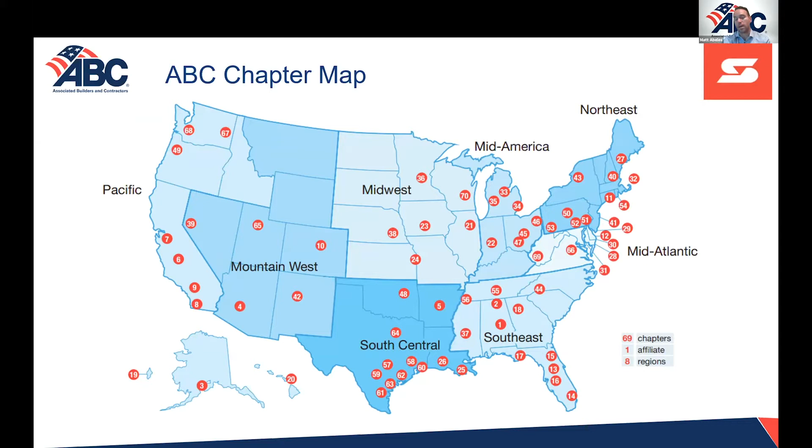We have 69 chapters across the United States, and within that we've got, as I mentioned, 22,000 companies involved. Most of those contracting companies fall under the mid and small size contractors, which is a little different than other associations, and our breakdown is here. So we've got a mix of everything. A lot of the other associations are focused on, maybe it's electrical contractors solely, or just mechanical contractors.

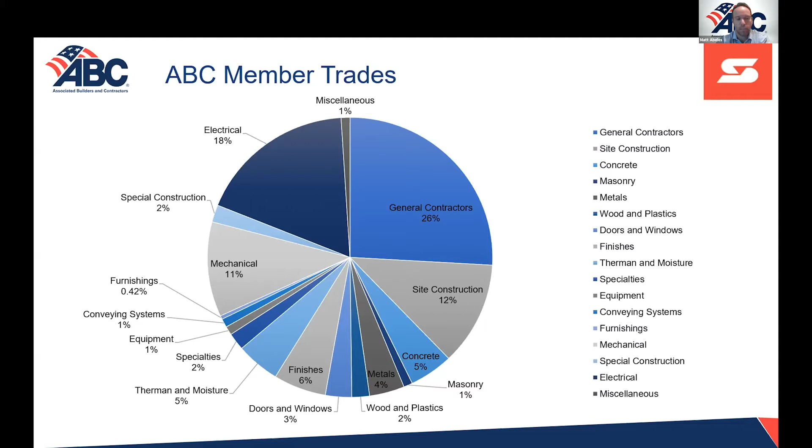Our association has diversity in that we work with general contractors, electrical contractors, mechanical, specialty—kind of a wide variety. I wanted to give you a quick rundown on who we are. I think it's important for context, and if anybody wants to get involved or engaged, you can reach out to me, follow us on social media, sign up for our free newsletter on Newsline, or just look at abc.org.

So I'm going to get into what we're covering. I want to start with COVID-19 technology solutions. I think starting here is important because when talking about a healthy job site of the future, given the unknown future, we have to start with how we're using technology and different practices to create a healthier job site during these trying times.

I'm going to talk about some solutions helping track people on the job site—specifically who's entering and exiting—ensuring the health of employees, documenting health, which is more important than ever, along with social distancing, how we're ensuring that social distancing, and monitoring proper PPE gear on job sites.

Here's a bird's eye view of some solutions being used today during COVID-19. Starting at the top left, the first two squares—that's a company called SoberEye. It's a 1-minute self-test that tests for fatigue, illness, alcohol, drugs, even if you're affected with COVID-19, in a portable, easy-to-use device with real-time monitoring. This takes an iris scan to get results, is fairly cost-effective, and is a solution that wasn't born in the U.S. but is coming here and being more utilized on job sites.

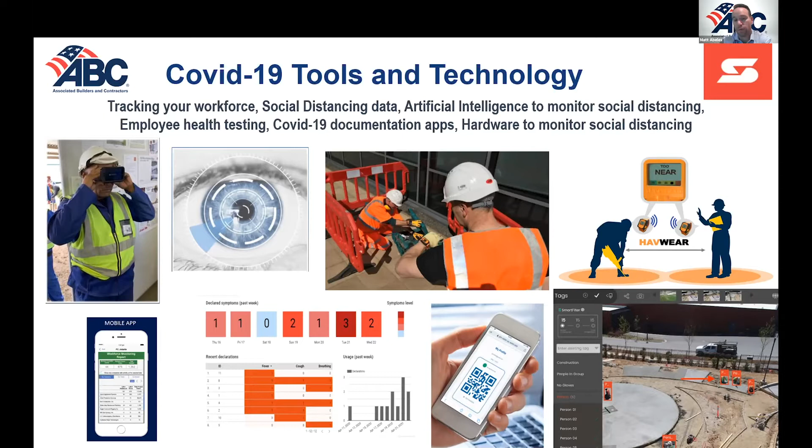Going a little deeper, SoberEye tests fatigue, sickness, alcohol, and drugs using a pupil scan. In the middle you can see this is a simple 1-minute test, and it's a subscription-based service. I like it because it's easy, intuitive, and non-invasive. In my experience with construction, the most intuitive technologies are the ones people actually use—the ones that provide quality data without overhauling too much. This is one I'm a big fan of.

Smartvid.io, I mentioned this a little bit, using real-time artificial intelligence to track those things, and not even just the PPE gear. You're also looking at tracking lifts, equipment on the job site, and ensuring social distancing. But the analytics and the data behind their safety observations, their dashboard is really impressive and easy to view. It's been helpful for a lot of companies, both large and mid-size. So as far as companies I'm looking at and I'm a big fan of, they're definitely high up there.

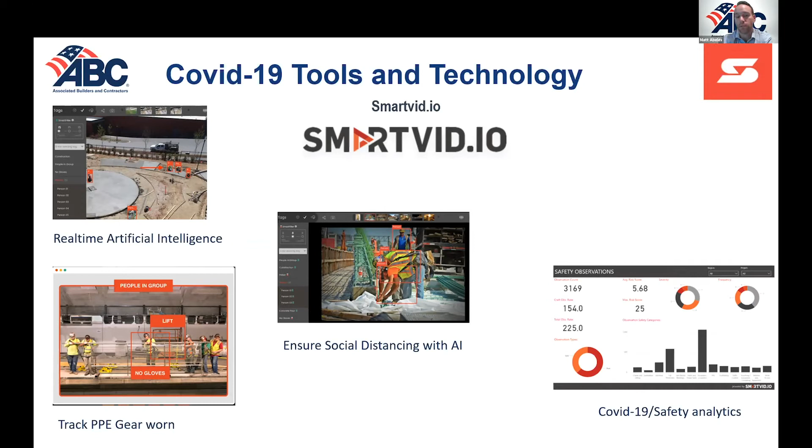So Reactec, this was another one I spoke of. That smartwatch is capturing real-time personal exposure to hand and arm vibration. It's looking at risk across your job site, but the system itself, outside of tracking your history on the job site with everyone, can tell where you've been, who's been exposed to who, where they've been on the job site, and take those analytics and send it back to management.

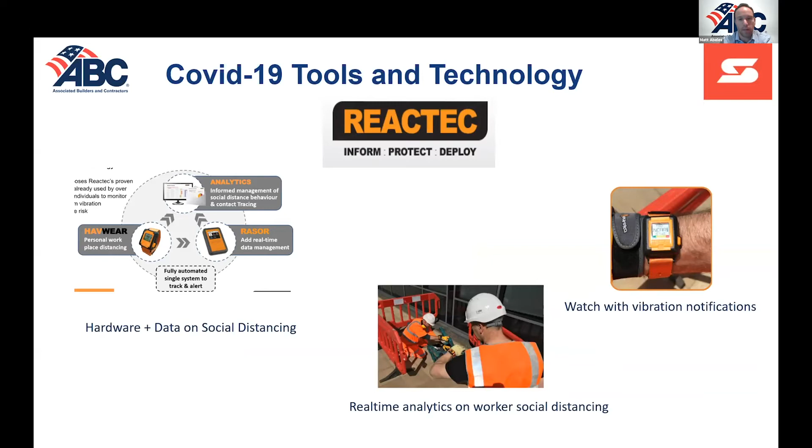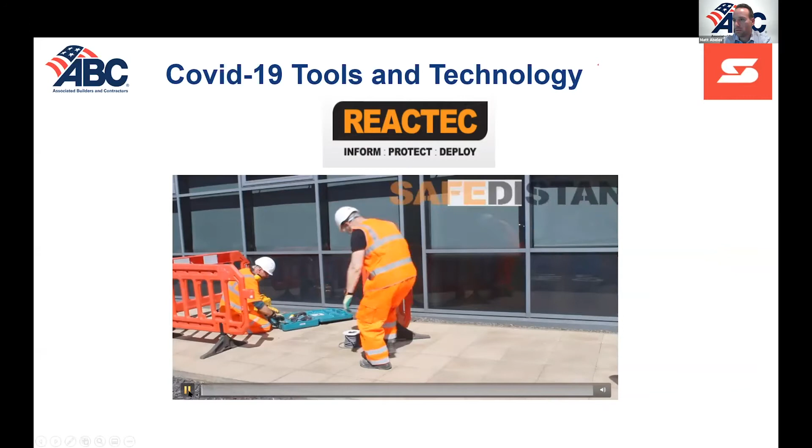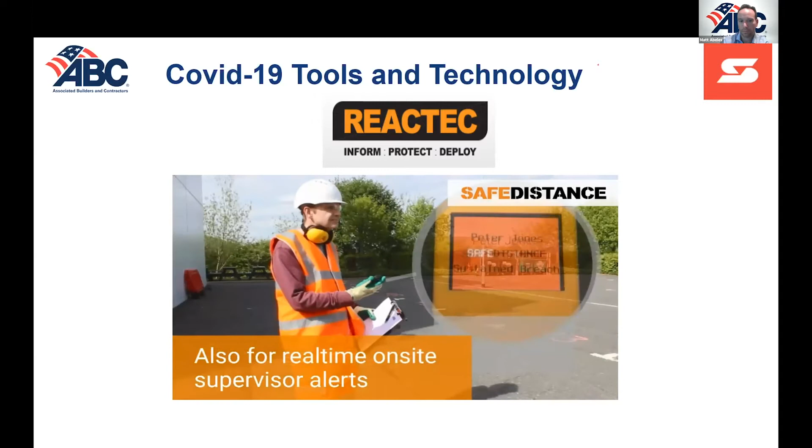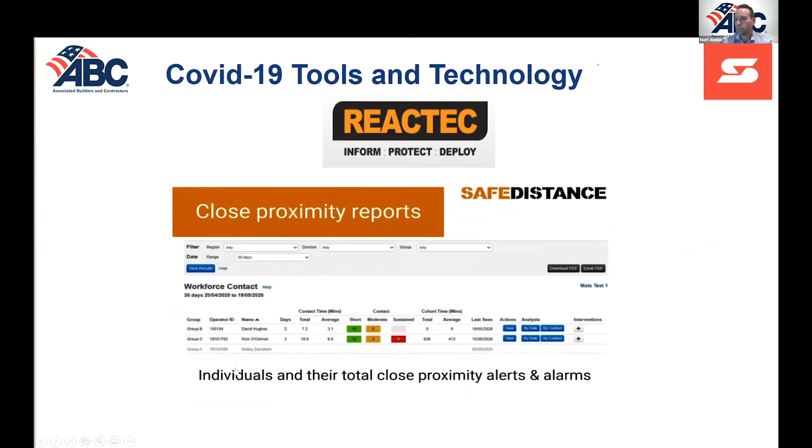So instead of me getting too far into it, I want to show you a quick video on this. For the interest of time.

So the next one I want to highlight is field control analytics. They've been an emerging player on the scene, and what they're doing is really simple: real-time COVID approvals for the job site. It tells you to the exact second when someone filled out their health screening, said they were okay, and were approved to go on the job site. They need to get approved every day. But then what they do that's extra impressive is the workforce monitoring report. They can show you how many and what types of trades were on each job site, minority stats, ethnicities, skill status, veteran status, all put on this dashboard.

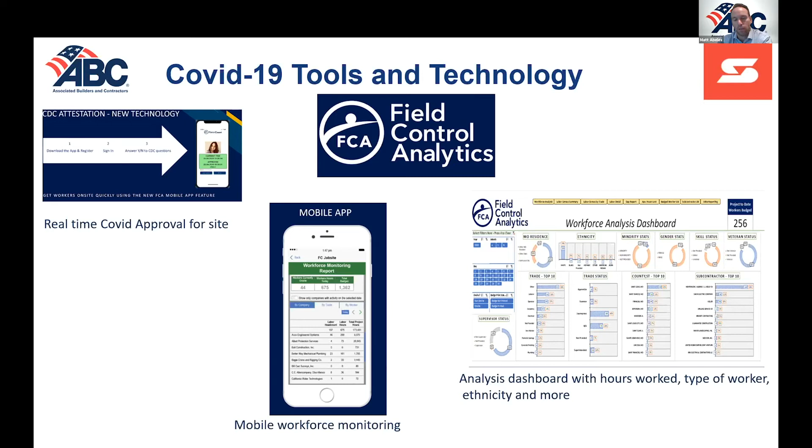And what companies are using this for, especially now with diversity and inclusion being a big topic, is taking a closer look at what's going on at all of their job sites. I like field control analytics because for them, data isn't secondary, it's primary. So they've done two things: made something very impressive for COVID, but also a very clear dashboard on what's going on at your job site in real time, looking at man hours, worker demographics, worker emergency contact info, safety training certification, contractor hierarchy, some of the critical data points that people should have.

So moving on, still on the topic of a healthy job site, I want to show you a few more safety technologies. Let's get into that. Just highlighting a few other things that I think are interesting when we look at what's going on with a healthier job site. I'm going to start actually in the bottom right this time.

So on the bottom right, you have a company called SafeSite. SafeSite is digitizing the safety documentation process. Not only are they digitizing everything, they're making it really simple to make sure all the safety requirements for a job site are there, that your toolbox talk information is in one place, and they've even come up with a way to grade every single job site based on what you put into the system. So they're giving real outputs that take predictive analytics into account.

To the left of that, you have a company, Pillar, and especially now with what's going on with wildfires out there, I think it's interesting that Pillar looks at what's going on in the job site conditions. So air quality control, looking at things like dust, making sure anybody who goes on the job site is safe. So in California, for example, where the air quality has gone down because of the wildfires, Pillar is a great device to tell you if people should or should not be on the job site.

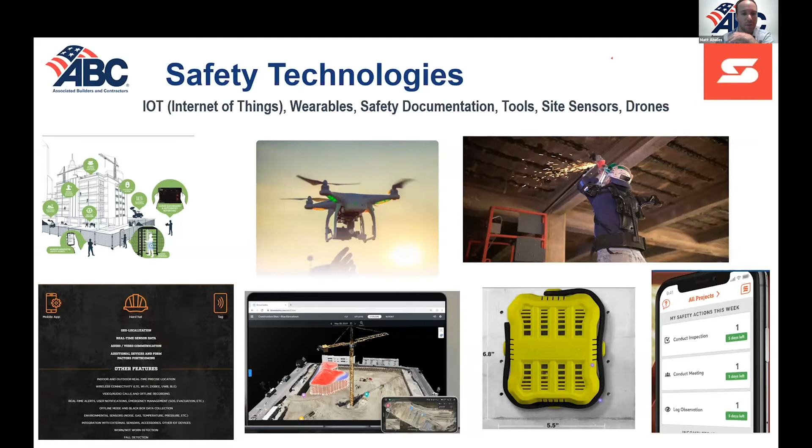One of the technologies I want to highlight is Triax. They have an IoT device to track worker safety. What they're doing is not only tracking where workers are on the job site, they're also tracking tool utilization, and they do a great job of safety analytics on the job site. If someone actually falls on a job site, it will also notify everyone that someone is hurt, and that it's an important scenario that a supervisor and everyone needs to be aware of.

I'll give a quick video on this in our time, but when it comes to job site safety and security, one of the most critical components is having full control over who has access to your site.

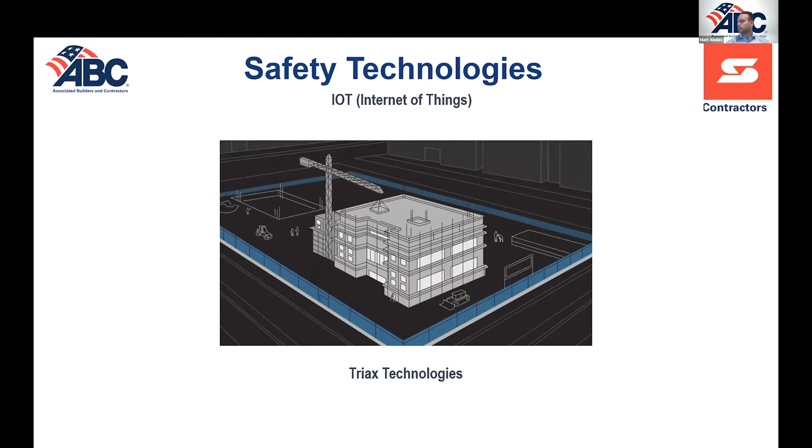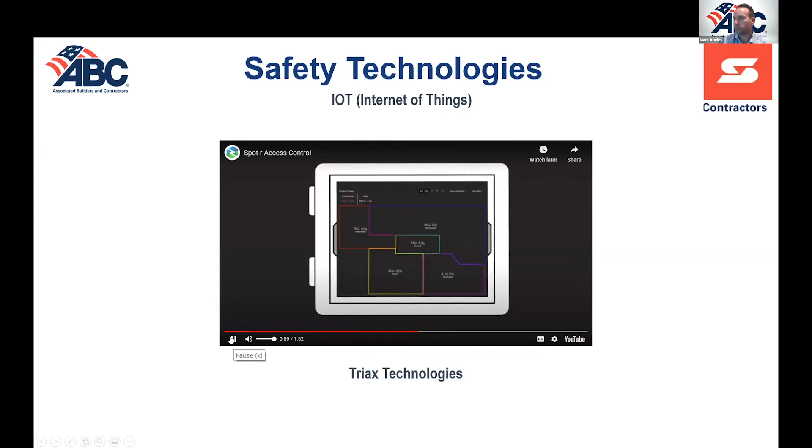Welcome to the next generation in construction site safety and security with the complete Spot-r connected job site solution and all new access control offering. By integrating the powerful core Spot-r technology with physical turnstiles, contractors have greater control over who gets onto a job site and unprecedented visibility into their presence on site. This essential technology gives you a higher level of accountability for anyone accessing your site and ensures those who lack proper credentials are prevented from doing so. The Spot-r clip serves as a worker's sole badge to get on site based on worker profile, certifications, or time of day. This provides a clear central record of when someone enters, when they exit, and where they're located by floor and zone to account for real-time and historic workforce activity. Unlike other access control systems, only Spot-r takes you beyond who...

Sorry, again, just in the interest of time, I want to fast forward. So Pillar, I mentioned before, is a hardware device that helps with on-site conditions. The one thing I'd add is it tests a lot of important things: temperature, humidity, carbon monoxide, noise, light, pressure. And if anything is off, it sends instant notifications to the supervisors on site to let them know what's going on.

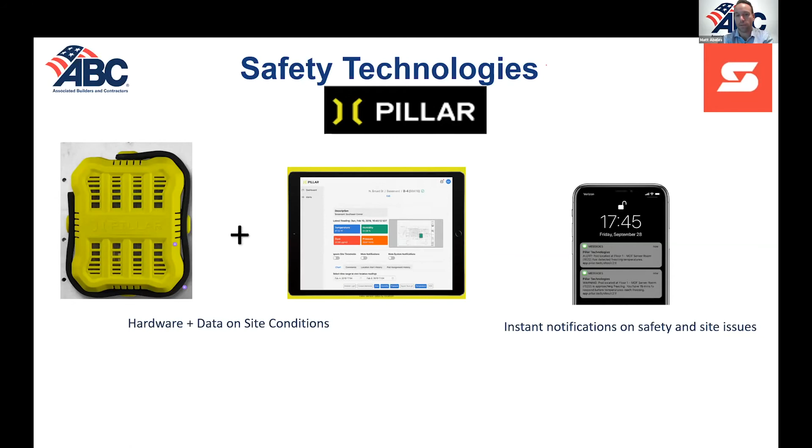And SafeSite, I wanted to highlight them. Again, this is a simplified safety documentation solution. For ABC, we have a lot of small, mid-sized contractors who may not have the budget of some of the larger contractors, so SafeSite is nice because they have a free version that helps you start making yourself more digitized. They're actually one of the companies involved in our inaugural technology alliance, which I'll mention later. It's a solution that's simple, intuitive, and has improved safety performance and communication by scheduling and tracking safety actions. It's easy to review your safety data, and it's done a great job of that. Like I said, to give yourself a score, almost a report card, for how your job is doing, SafeSite can give you some nice insight there.

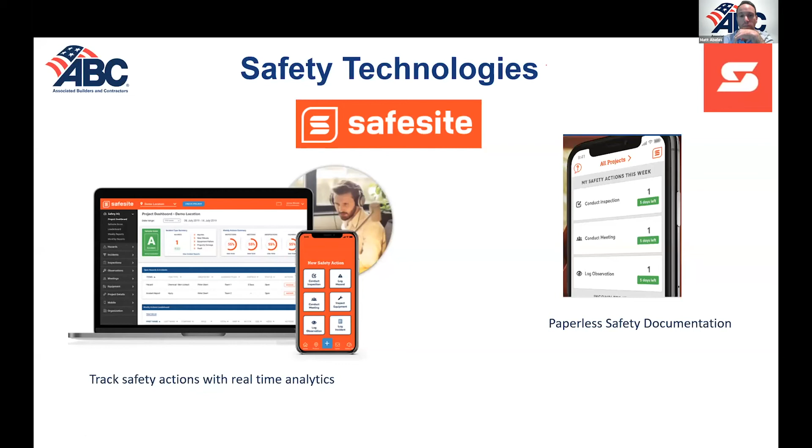So I'm going to go into job site efficiency. I think collaboration and site monitoring is a big piece of that. With what's going on with COVID-19, you have a lot less people on the job site and a bigger need for people to collaborate more off the job site. So when you're looking at job site efficiency and the future of that, you're really looking at a different way in which we collaborate.

The things I want to focus on, number one, if you look at the top left, I think most people are familiar with Zoom, but still we don't have it being used by as many people as you might think. Zoom is now getting more incorporated into construction. They recently built a partnership with Procore, and you're seeing a lot more contractors, not just the big ones but small and mid-sized firms, using Zoom as a way to collaborate. It really is cost-effective and one of the simplest, most intuitive solutions out there, but still there are a lot of contractors who aren't aware of it.

So there are three different solutions that I wanted to highlight specifically: HoloBuilder, StructionSite, and Open Space. These companies are all doing something very similar in that they're providing a visual command center.

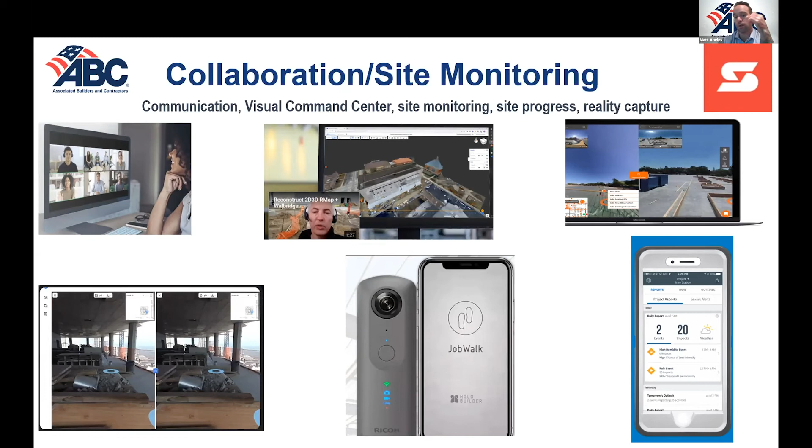So, not to get too into it, but if you look at Open Space, again 360-degree photos and documentation - this can be done on your cell phone. If you look at the bottom left, it shows quickly what happened from a certain point in time. This also makes sure that people get paid - it can say, hey look, we finished the job, you should pay us. Open Space has done a great job with portfolio management and making their solution easy and intuitive to use.

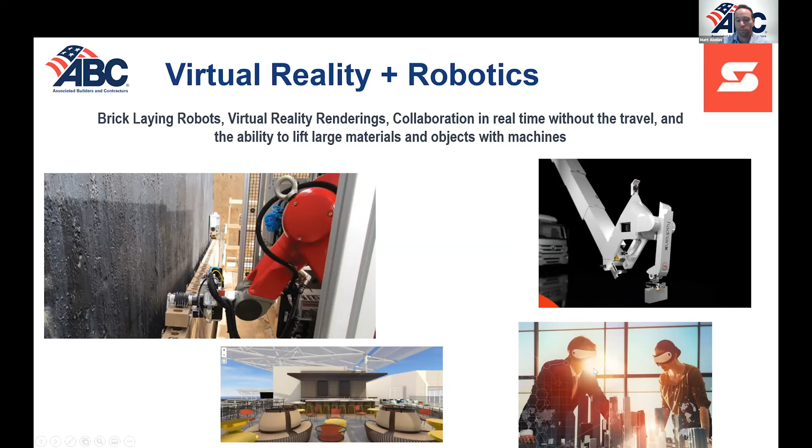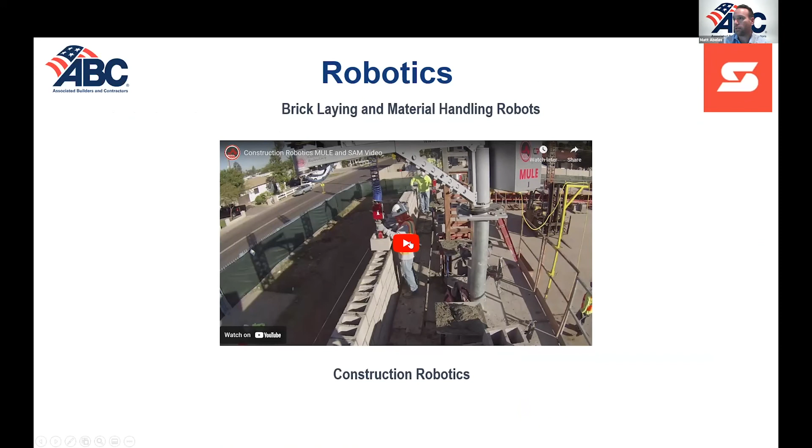I want to give you a quick insight into how robotics is being used, not just for laying brick, but also for transporting materials. I'll give you a quick insight here for about 30 seconds.

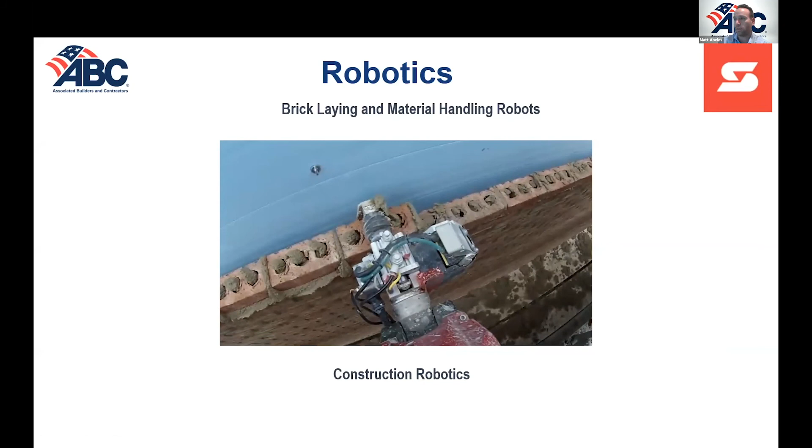So here you're seeing what the bricklaying robot is doing. This is being used on many job sites, and you're seeing the use of this type of robot, specifically from Construction Robotics, increasing throughout the United States especially.

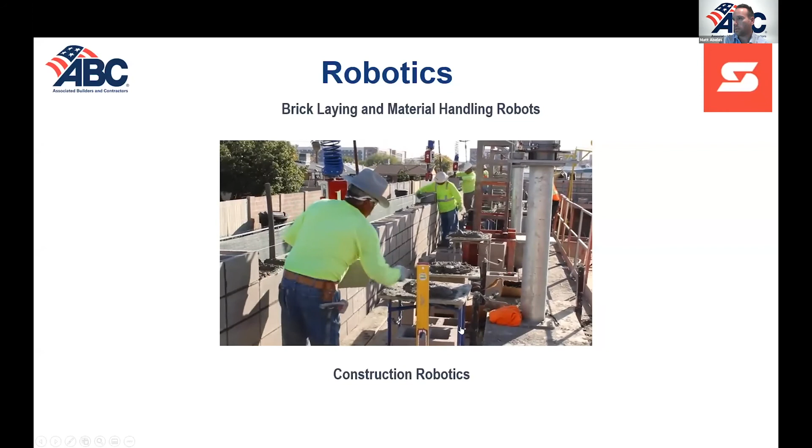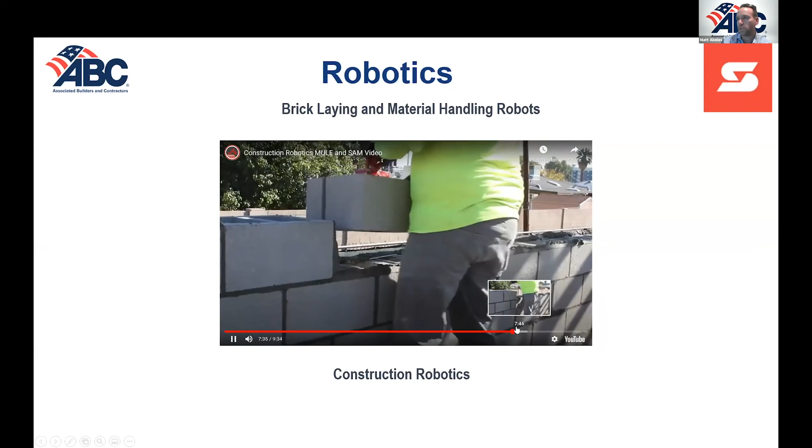Fast forward over here, and this is another robotic tool that is helping transport materials, transporting different cinder blocks. This is just another way robotics is being used to help transport heavy materials. I wanted to highlight that, and now I want to show you the virtual reality use I mentioned before.

This is another quick video, but I want to keep things visual. I think it's helpful for everyone, especially when we're looking at these types of tools.

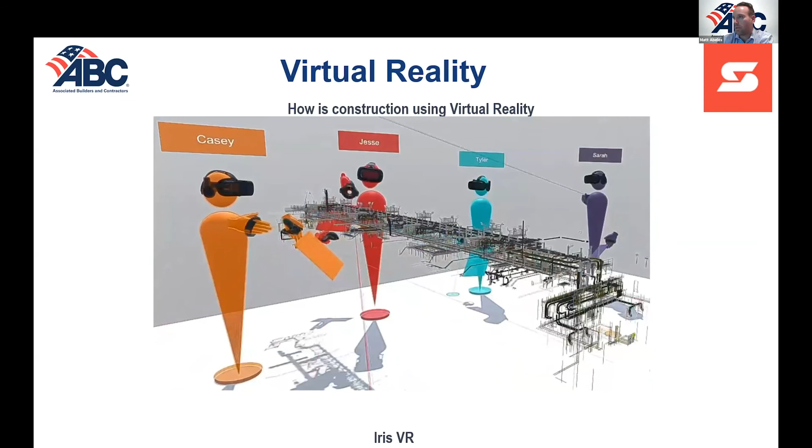You can see here you have multiple people all across different parts of the world looking through the BIM model of a stadium, and they're able to point out certain things in real detail. With virtual reality technology, you can get into the weeds and details of these models and buildings, especially large buildings like stadiums. It becomes really useful.

The last thing I want to mention, with ABC, I've recently put together a technology alliance, a consortium of 13 different companies helping small and mid-sized contractors. They're all different types of tools and technologies.

Oh, I did see a question come up. Sorry. So, curious about remote distance workforce: could a safety observer or crane operator work from home using on-site cameras? Could a retiree work part-time remotely?

Remote workforce: could a safety observer or crane operator work from home using on-site cameras? It's tough to say, it depends. The short answer would be yes, but it depends on the job and what's being looked for. If you're looking at specifically tracking progress on a job site, so someone whose job is to track what's going on and make sure everything is up to speed, that can definitely be done.

When you're talking about a safety observer, yes, there's technology to allow safety observers to work remotely now. Crane operators, I think, is a little different, that's tough. There is large equipment being used that involves unmanned vehicles, but that's a different thing. Those are being used for unsafe areas, like going into mines.